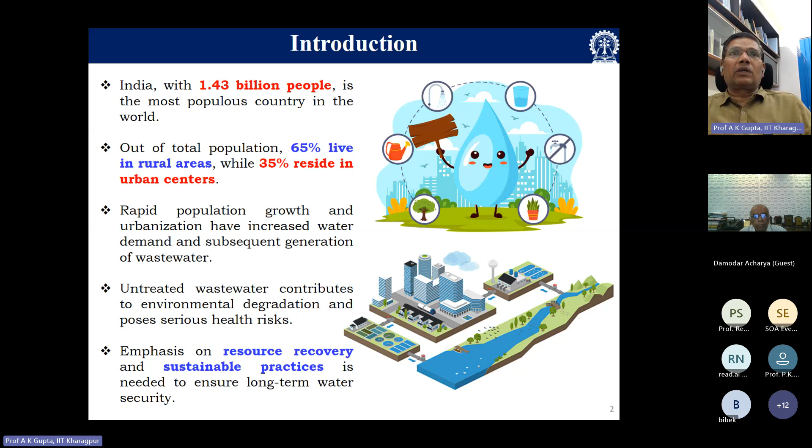As you can see from this picture, normally we see the water cycle, hydrological cycle. I have tried to make it in compact form to show how the water cycle works. We start from sources like dam and reservoir. From there, water comes to the water treatment plant. From the water treatment plant, it is supplied to different reservoirs and to residents, businesses, and industry. Once the utility is over, wastewater is generated and it goes to the wastewater treatment plant.

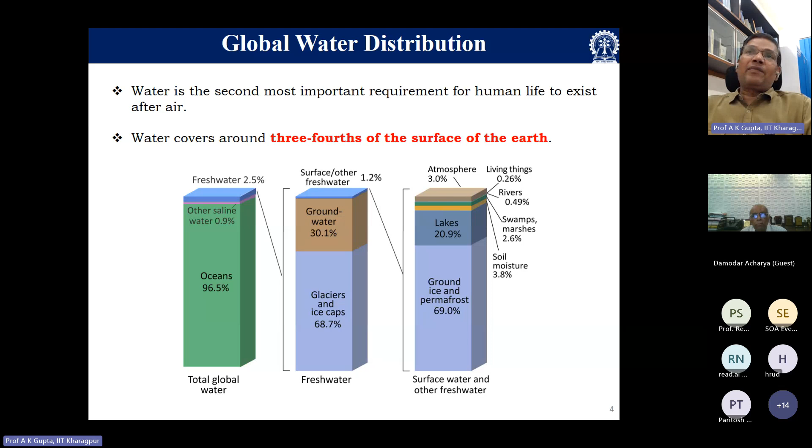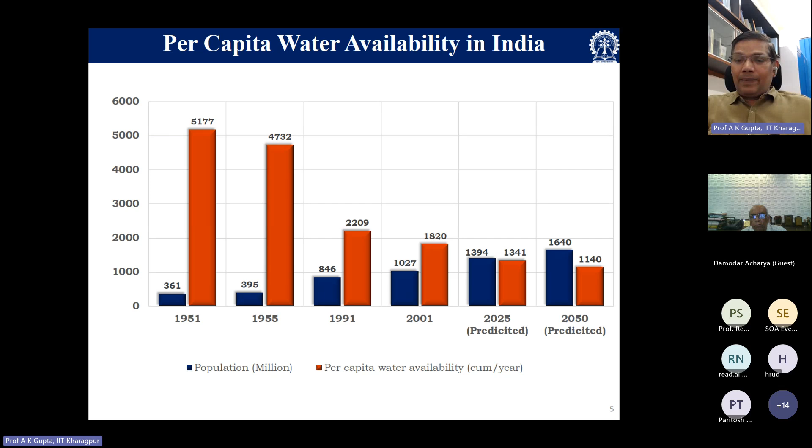So what is the importance? When we talk about water, we require raw water sources. The sources should be reliable, accessible, sustainable, and should not have over exploitation. Most important is the cost of treatment and environmental issues.

As we know, there are two major sources: surface water and groundwater. Groundwater, in most places, is contaminated, with geogenic pollutants already affecting its quality. Surface water comes in the form of lakes, ponds, and reservoirs.

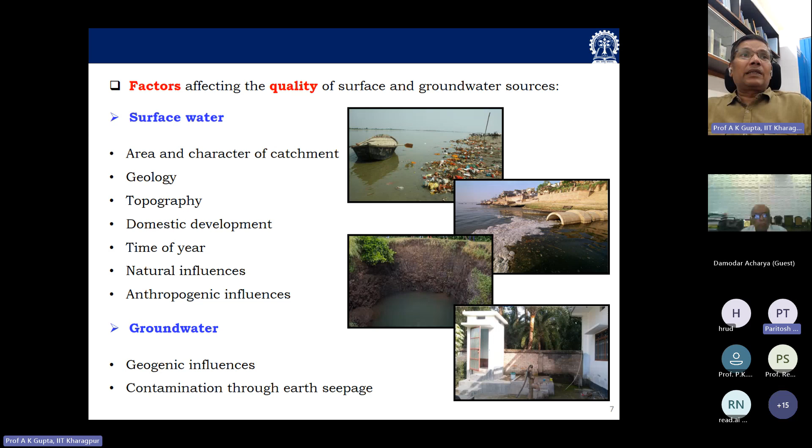Now you can see surface water availability is gradually decreasing every year, just like groundwater, because of a lot of sedimentation, contamination, and other issues, which I will come to later. So this is how groundwater and surface water are being affected.

Now you can see in India, for surface and groundwater, the government has already set up a large number of monitoring stations. They regularly monitor groundwater, particularly quality, and in some places the level, which is gradually decreasing by 20 centimeters per year, which is really alarming. In many places the groundwater table has gone down very deep, making it difficult to extract further.

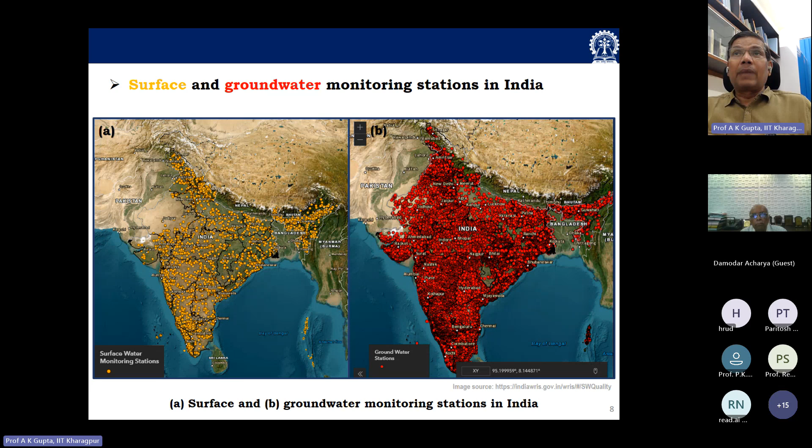Similarly, this is state-wise monitoring, and the parameters they are calculating are mainly a few quality-wise parameters, which are not sufficient. We require more than 30 parameters to be monitored if we are using water for drinking purposes.

These are the state-wise groundwater monitoring stations with different parameters. Earlier it was surface water, but the same parameters are being used for groundwater. I'm not going into detailed technical aspects, but this is so that everybody can understand.

This is not easy. As Professor Acharya has mentioned, for the first time in any IIT, only in IIT Kharagpur do we have a full-fledged water treatment plant. No other IITs have a water treatment plant. This credit goes to our ex-director Professor Acharya, because of whose initiative we were able to set up this plant.

And not only that, we are going to start another water treatment plant because of additional water requirement. So what happens traditionally in a conventional water treatment plant is mainly the removal of particles, particularly suspended particles, and some of the dissolved gases from the water.

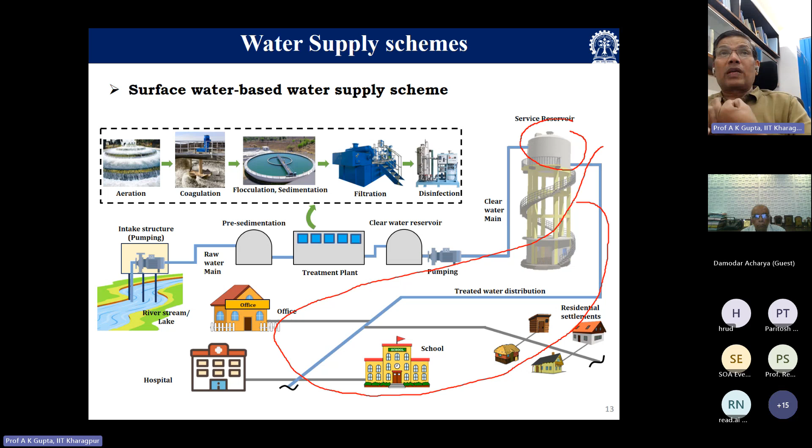If the water is contaminated, we are using more chemical, that is also not sustainable. This is similar to what I showed for the surface based scheme. Similarly, if you are taking groundwater, some of the units can be avoided. If groundwater normally has no turbidity, you can use the chemical directly, filtration can be used, and then we can supply.

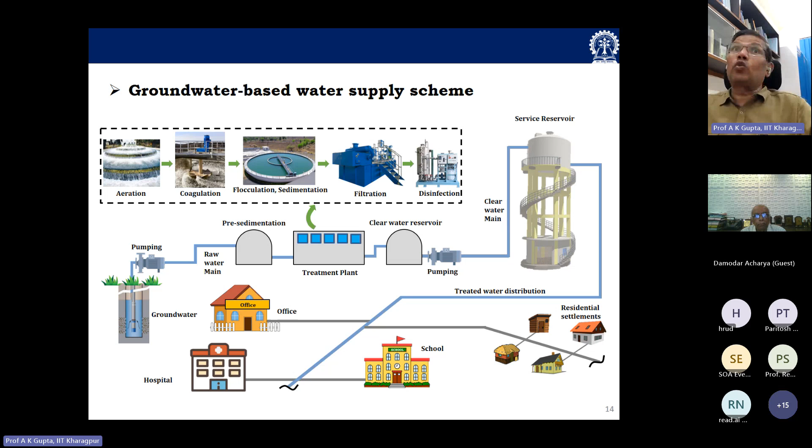It is not always good to use chemical for water treatment. Now, what is the purpose? Somebody will ask, why are we treating? So, making water safe, aesthetically pleasing, potable, and it should be free from disease-producing bacteria. That is the purpose.

So many times, everybody in the household nowadays keeps an Aquaguard or RO. We should have confidence in the public water supply, but sometimes we don't. So nowadays the government is also planning that everyone should know what the quality of water coming is. There's a lot of development now. We can use sensor based monitoring so that we have confidence the water coming in the tap is clean and can be directly consumed.

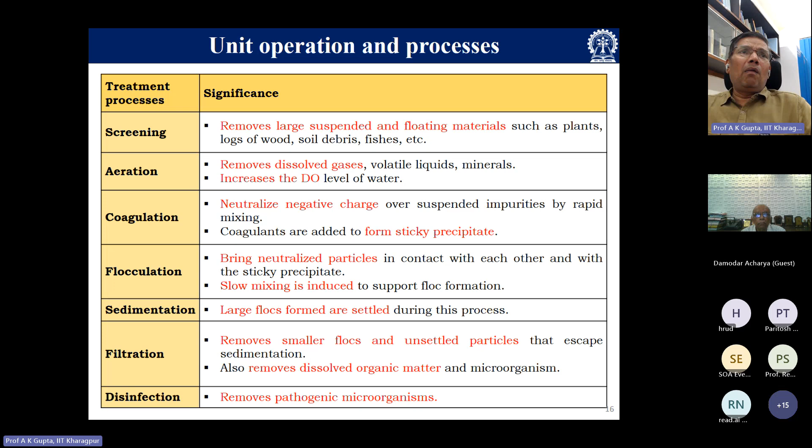Other countries have already started this. So just for a brief overview, these are the various units which we have already discussed in the plan, but not necessarily all these units should be implemented. Just to show people, this is a small animation of the major units in the water treatment plant.

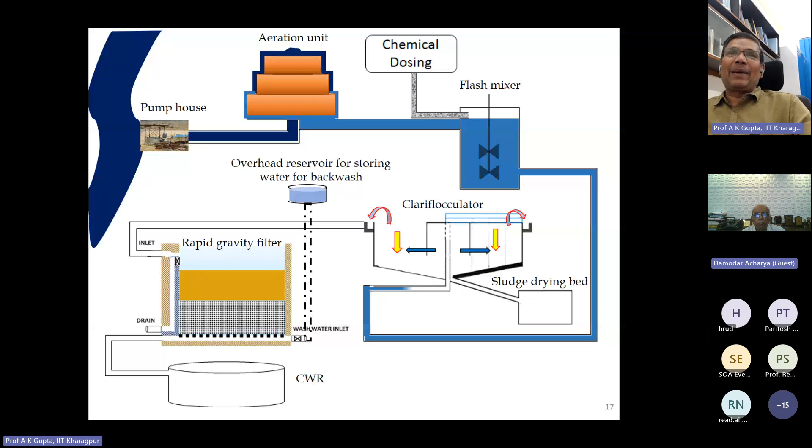You can see first we are raising the water level so that oxygen is added. Then we are adding the chemical, and after adding the chemical, along with the sludge, we try to remove whatever chemical we have added. Through the filter we are cleaning it, and then we have to store the water in the reservoir for 1 or 2 days, because sometimes there is a possibility of failure in the pumps and other systems, so that the water reserved in the reservoir can be supplied effectively to the consumer without any disturbance.

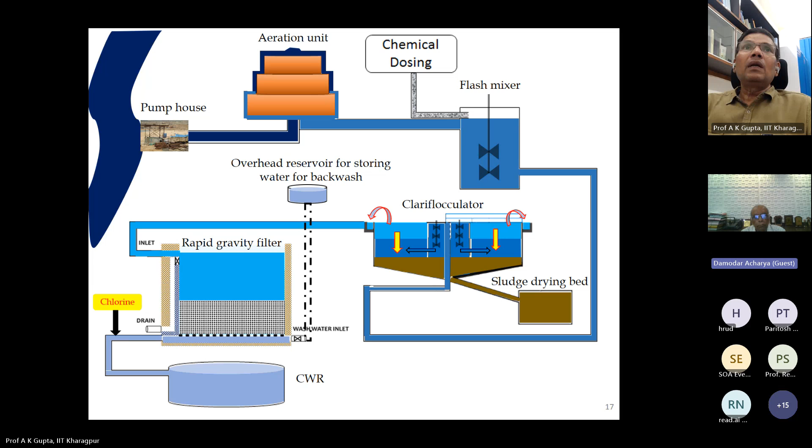Now you can see water treatment. In the last few years, it's drastically increased because of the demand of the people. Now in the Jal Jeevan Mission, which the government of India started, this is a flagship program where the purpose was to provide each and every household safe drinking water by 2024.

Many states have already achieved this by laying the pipeline. Some states are still struggling, and hopefully within another 3 months they should be able to connect. I was even associated with Andaman Nicobar Island. I did the water audit for many schemes there. Imagine a small population of 3-4 lakhs, total Andaman population maybe 6 lakh, with 3 lakh being the floating population.

Imagine the difficulty - water is all around, but there's no water available for drinking purposes. So imagine how much money they are spending to provide safe drinking water to each and every consumer. Now they have achieved 100% of the target, and in many places simply by constructing check dams they are supplying the water. The streams come and they stop the water for some time, and that water is supplied using slow sand filters.

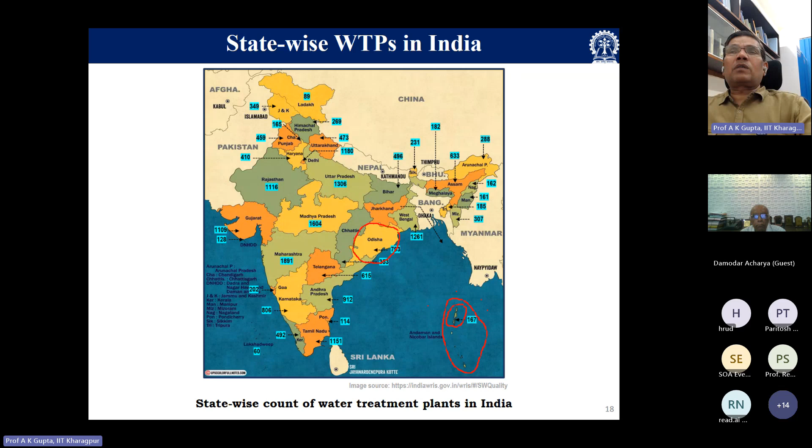Now you can see the number of plants, and imagine the importance the government has given to this sector, because this is directly related to the health of the people. If water is not good, then our society cannot be healthy. So the first focus is how to provide safe and hygienic water to everyone.

Now, many of you may not be aware that while treating the water, a huge amount of sludge is generated. This is not easy - whatever suspended solids are coming, plus we are adding chemicals. What chemicals are we adding? We are adding lime, alum, and chlorine. So these are the three chemicals we are adding to the water.

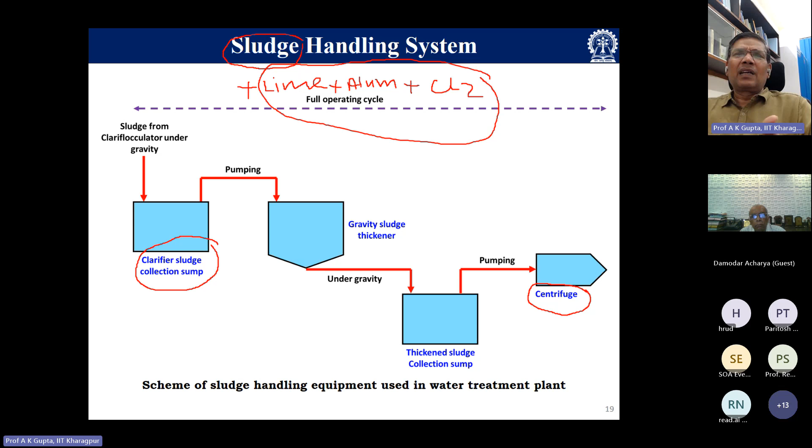Imagine these three chemicals have to be removed before supply to the consumer. When we remove them, sludge is generated. This sludge has to be removed and safely disposed of. There is a system to remove the water from the sludge, and ultimately the sludge which is generated should also be disposed of safely. Nowadays, big manufacturing companies are taking out this sludge.

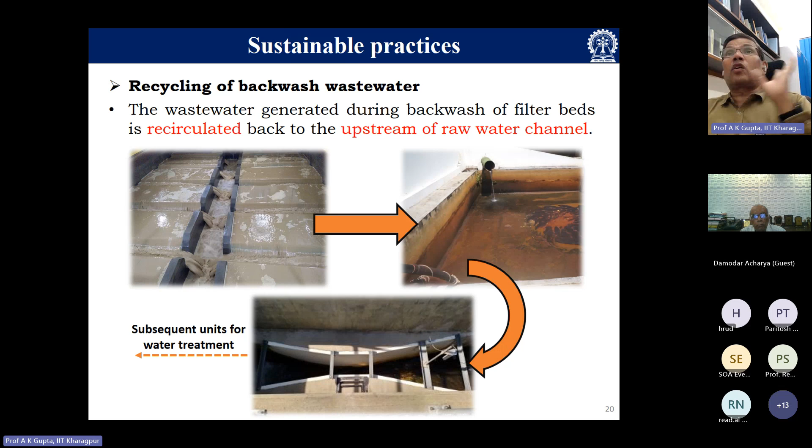Now imagine the large amount generated when we use filters. While backwashing, a huge amount of water is generated. This water has to be recycled because the biggest costly thing is water. We should not waste even 1 liter of water outside before recovering it. Even from the sludge we can recover water, and only the solid part needs to go outside. So the sludge part is also important.

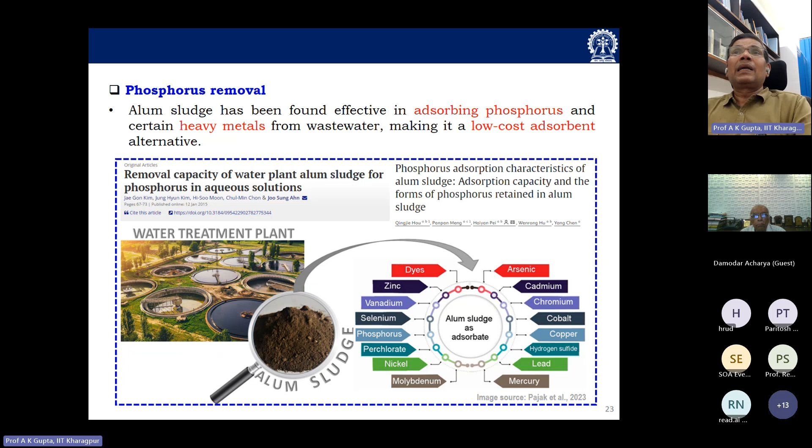This is what we call alum sludge, since alum is used. This sludge can be used for multiple purposes, such as making bricks, and nowadays alum sludge can be used for ceramic bodies and different shaping techniques. There are a large number of applications for sludge. It can be used to remove various dyes and other pollutants from wastewater. So whatever byproduct comes out from the treatment plant can also be used there. These are large number of applications of alum sludge.

As I was talking recently, I have done one project of 69 MLD water treatment plant. Imagine 69 MLD - it is not small, it is very big. Imagine 69 million liters of water per day. The problem was that space was not available. Land was also a problem. Because the water they are taking is from the Ganga, water was not a problem, but constructing 69 MLD, they said land is not available.

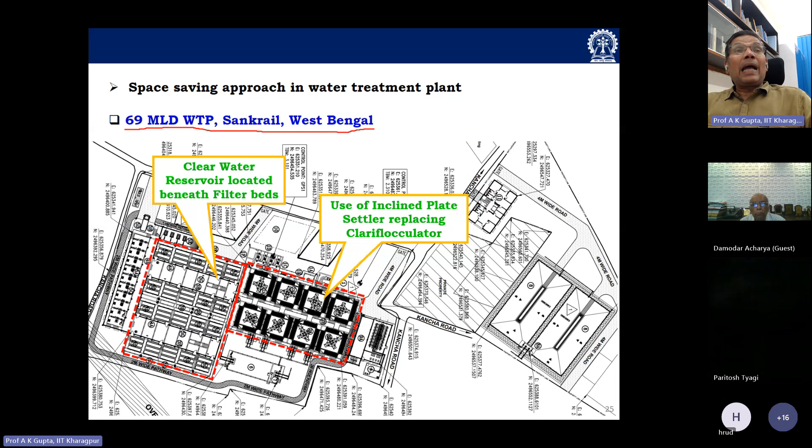So we had to think about how this space could be managed. In this project we recommended the inclined plate settler to be used. You can see in the treatment plant, it is multi-story. This is the first time a multi-story water treatment plant was used. Below the filter plant there is a reservoir constructed. You can see earlier I showed you that we required a sedimentation tank, but here there is no sedimentation tank. They use the inclined plate all around the flocculator so that the space of the sedimentation tank can be avoided.

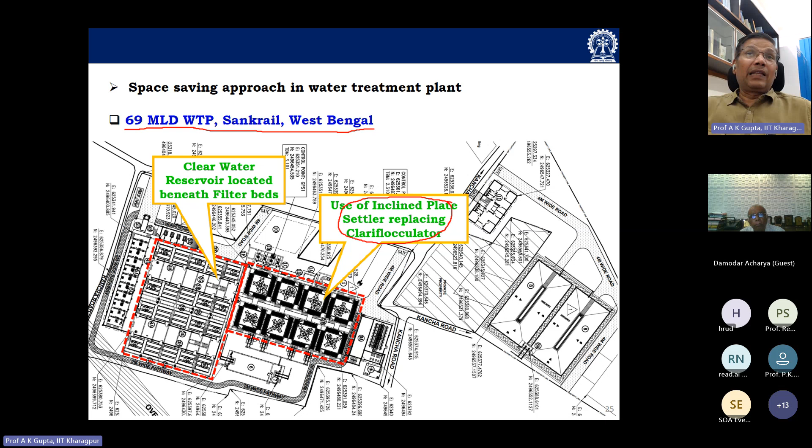And the reservoir is below that. So there is a lot of advancement. You can see how these different units use the technology of the inclined plate settler and tube settler, where they can provide clear water and the area required can be less. This is, I think, the first plant in West Bengal to use the inclined plate settler. Already even wastewater plants are being constructed multi-story because of shortage of space.

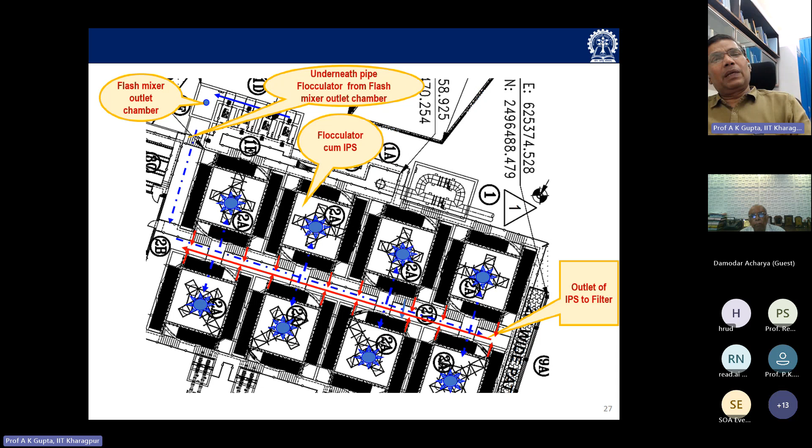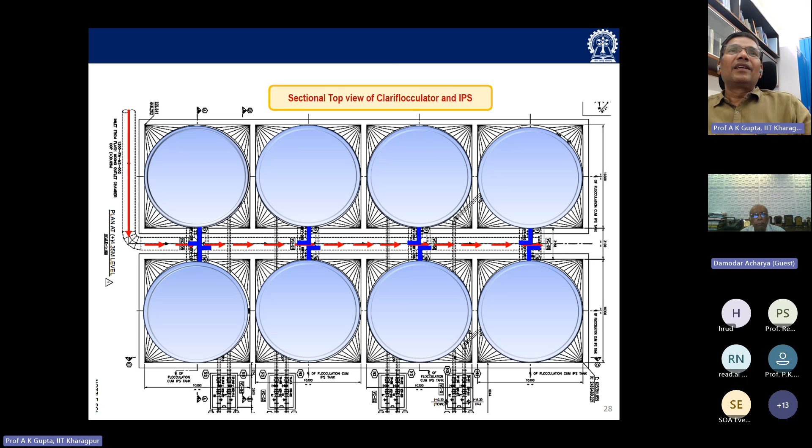This is another view of the flocculator, and this is the top view. This was a very interesting project where the reservoir was constructed below the filter. Normally earlier we construct everything separately, but here most of the units have already been constructed, so very soon it will start operation. This is space saving.

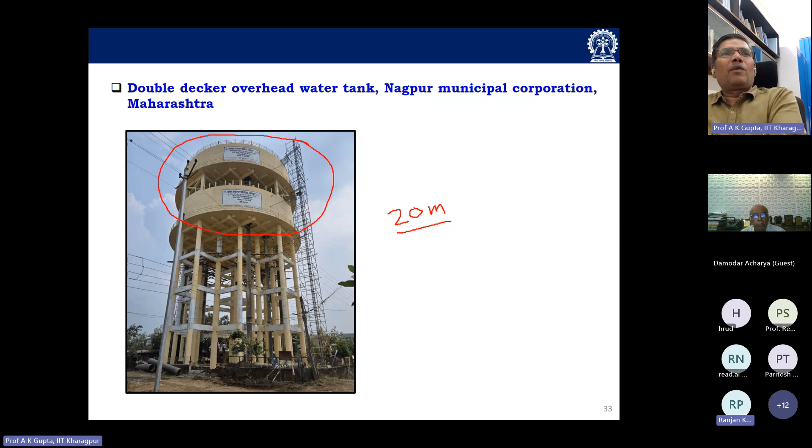Now you can see, recently in Nagpur, the overhead reservoir has also been constructed multi-story - a two-story reservoir. Normally the reservoir staging height is around 20 meters, 15 to 20 meters is the staging height. So what happens is consumers always complain when they are not getting sufficient pressure in their houses. Normally government recommends pressure like 7 meter, 12 meter and 21 meter.

So this much pressure is needed, but what happens is 21 meters is difficult because we are constructing reservoirs with 20 meter height. Sometimes, because of the topography, if our houses are lower than the finished ground level of the reservoir, then we can get slightly higher pressure also.

I was also associated with the first 24 into 7 water supply project. Many of you may be aware of the 24 into 7 water supply project. For India, the first 24 into 7 water supply project was initiated in Mysore water supply, meaning 24-hour water is available. In Mysore this project was initiated, and the topography was such that many people got higher pressure because their level was much lower.

So in this design, what is the target? Nearby houses can use the first time, and people who are far away can use the later time, so at least people who are away from the house also get the required pressure. As is known, around 5 meters is the loss of pressure per kilometer while traveling. So if water consumption is more, pressure loss will also be more, because it's directly related to Q, the discharge. If discharge is more, pressure will be less.

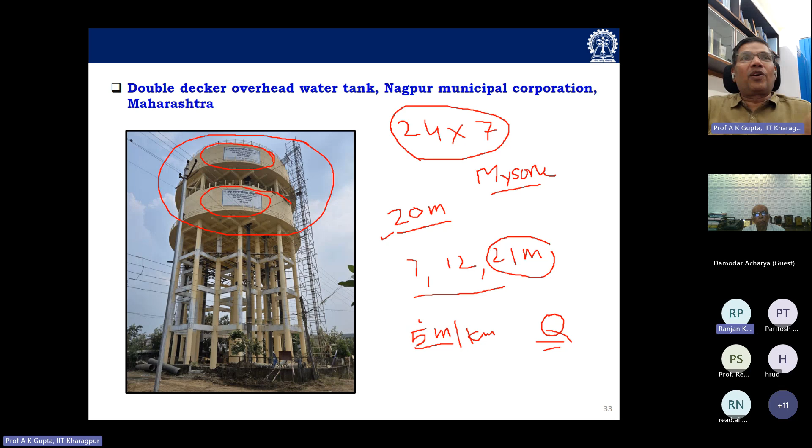These are from Nagpur, recently constructed. I wanted to show how space plays an important role for water supply distribution. These are mainly used to enhance capacity and pressure management, and this is cost effective also. The footprint is less because we use the same area going high rise. So this is one of the new initiatives that was done.

Now, recently I worked in Odisha, for the Steel Authority of India Limited. Here they have a lot of limitations. They cannot use a very high reservoir for supplying water, and sometimes plain land is not available. So we thought about how the topography can be used effectively for construction of the plant. We used the natural topography to reduce construction costs, constructing almost all units at ground level without any overhead structure.

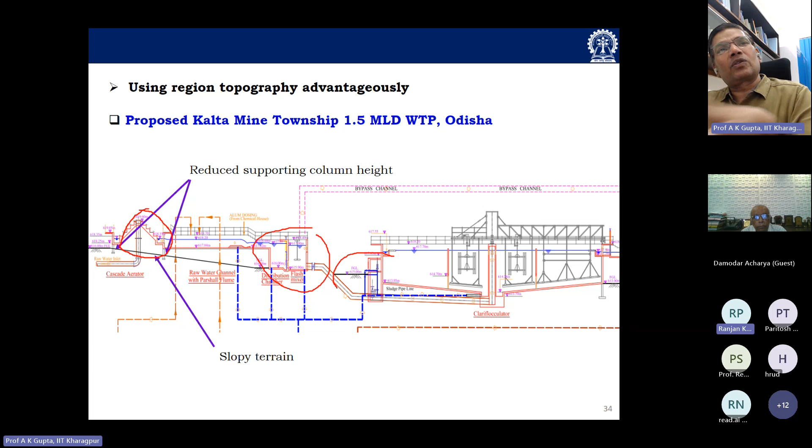Now I'm coming to highlight some government initiatives, because a lot of work has been done in this sector. Our Honorable Prime Minister has major focus on the water sector. He has said each drop of rainwater should be captured, and that's why they started the Catch the Rain initiative.

The Catch the Rain initiative means capturing each and every drop of water during the rainy season. We should conserve it, store it, and reuse it as much as possible, because in many places in the country we have sufficient rain, but it's our fault that we are not collecting that rainwater, which is much cleaner compared to other water resources.

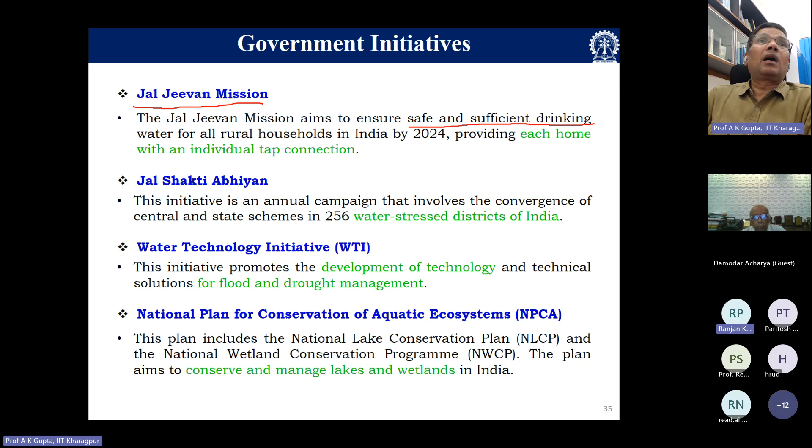Government of India's initiative, Jal Jeevan Mission, as all of you are aware, had the purpose of providing safe and sufficient drinking water to every rural household by 2024. All households should get an individual tap connection. Earlier this was not there; we provided community taps. So this was one of the initiatives, and IIT Kharagpur also contributed a lot to the Jal Jeevan Mission water initiative.

We gave our economical and efficient designs, and were associated with various water audits, design, and implementation of the Jal Jeevan project. Similarly, Jal Shakti Abhiyan had the purpose of an annual campaign about water for 256 water-stressed districts of the country, targeting how these districts could be handled so they also get water.

Another initiative is development in technology, because technical intervention is needed to solve the challenging problems of, particularly, flood and drought management.

Another initiative is the National Plan for Conservation of Aquatic Ecosystems, which includes the National Lake Conservation Plan. This is very important. Even in Bhubaneswar, many ponds were contaminated, and now they have been beautifully restored into lakes where people go. So this is one way research is also happening. The government has a massive plan for lake conservation and pond development, so that not only does research happen, but some places can also be used for water supply.

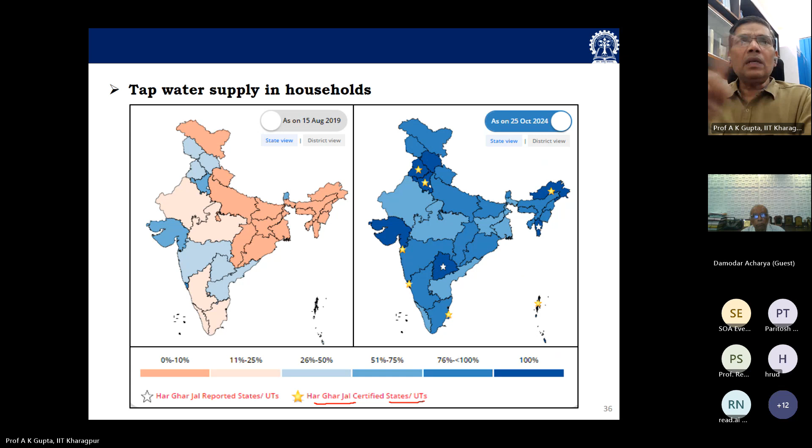To make sure water is provided and whatever wastewater is coming, because these two are linked, I will discuss later in detail how water and wastewater are associated with each other. Suppose river is our source of water, and upstream we are discharging the wastewater. So what will happen? The same contaminated water is coming into the intake structure. So it cannot be seen in isolation. We have to take care of wastewater management also along with water, otherwise this cannot be sorted out.

Before starting this, I'll give an example. Like Mumbai, now some industries are purchasing wastewater also. Government of India has already initiated National Mission for Clean Ganga, called NMCG. They have already funded many projects along the Ganga and its tributaries to construct wastewater treatment plants. This wastewater treatment plant is such that the government spends some money, and for the next 25 to 30 years they will sell the treated water to nearby industry, and that treated water will be used in plant operation. So this is one of the initiatives already.

Calcutta, several plants have been constructed. IIT Kharagpur was also associated with many such initiatives. So imagine how much wastewater is generated. Right now, in 2020-21, around 72,000 MLD of wastewater is generated in urban areas, and in rural areas around 39,000. So a large portion of this is being released into the aquatic environment with either no treatment or partial treatment.

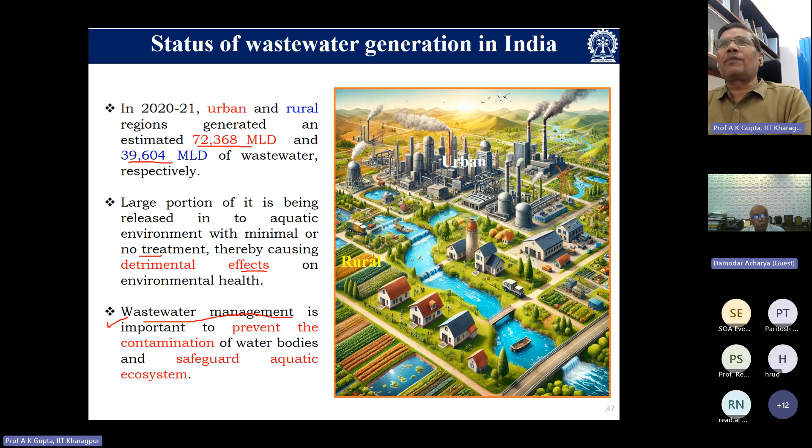So now the government's focus is, first, there should not be any wastewater discharge. Let it be used before discharging. If water is required, let it be reused. So the focus was on how to reuse this water. And second, the public should have confidence while using it. They should be made sure that they are getting cleaner water.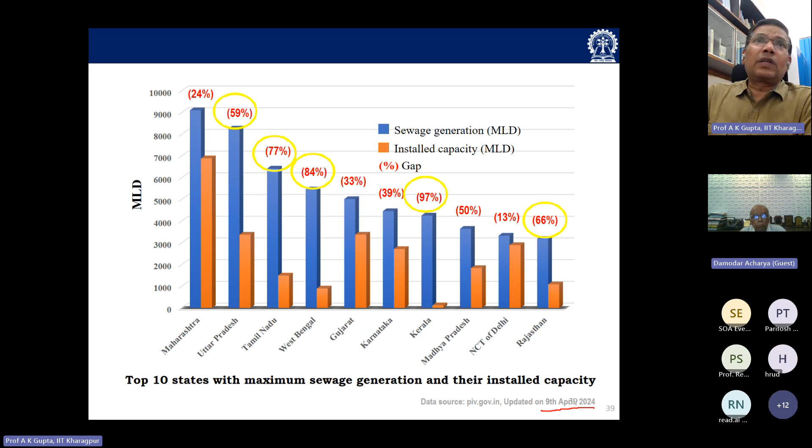So imagine these are the wastewater treatment plants across the country, but still there is a gap. These are recent reports from 2024 only. You can see still many states require massive sewage treatment infrastructure. Maharashtra has the maximum wastewater treatment plants, followed by Uttar Pradesh - these are the statistics. So we still have potential not only to treat but also to reuse this treated water.

Now the major problem with this wastewater: we have large amounts of suspended impurities, high biodegradable and non-biodegradable organics, we have nutrients - all this, otherwise people will not use it. So, as all of you are aware, whatever water we need...

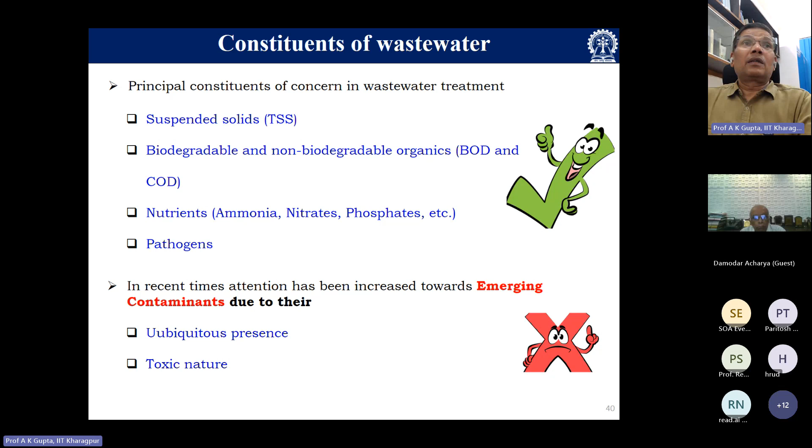Whatever water we need, 90% of the water we use for agricultural purposes. 90%. So can we not create facilities to treat this wastewater to be used for agricultural purposes? With proper planning, we have to convince the farmers, and in many places they are already using it. Sometimes when they do not have water, they simply use wastewater for their agriculture purpose, because many places cannot afford groundwater pumping - here no pumping is needed. From nearby, whatever the gravity flow, nearby farmers can use it. And even if pumping is needed, at least water is there. It is high time that this treated wastewater should be used for agriculture purposes so that this 90% consumption can be minimized.

So these are some of the important parameters which can very easily be removed. Earlier it was difficult, now it is not difficult. This contamination can be easily handled.

And in recent times, what happened? There's a lot happening at the global level in emerging countries, and the maximum impact is after COVID. So these are called emerging contaminants. These are very toxic in nature, and nowadays you must have seen the example of discharge from hospitals, some of the medicines we use. So this emerging contaminant also needs to be treated. But first we have to treat these four parameters so that water can be used. But yes, this emerging contaminant can also be treated.

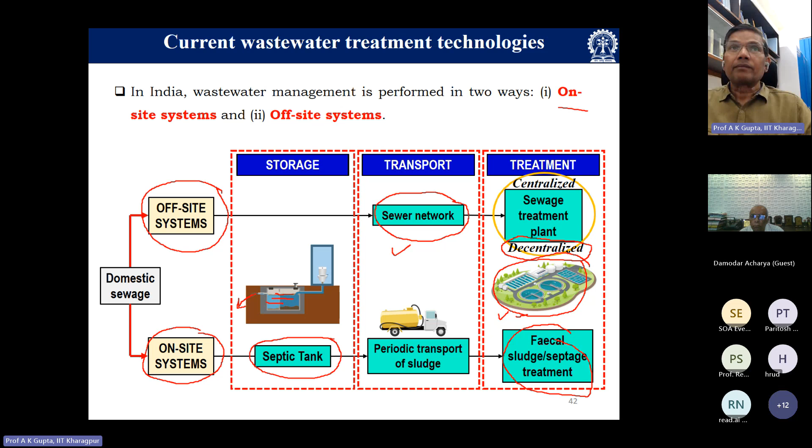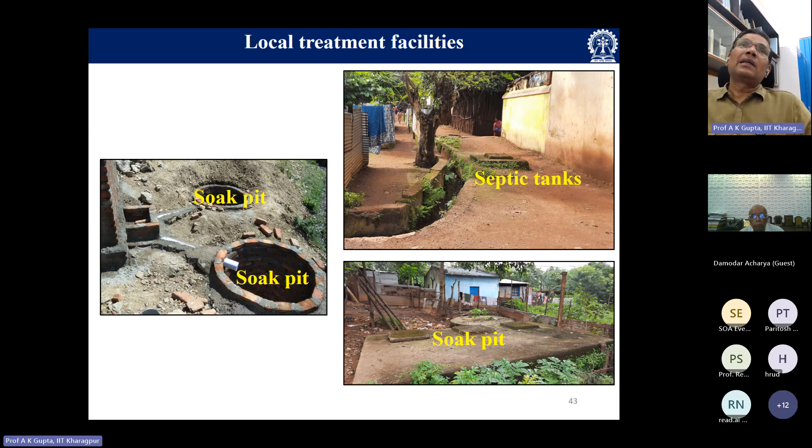You can see many places they are using septic tank and soak pit for small setups. This was one of the small mining towns where people have constructed a soak pit and septic tank. For small isolated houses, this is fine, but when we have a large population, we should go for conventional wastewater treatment.

So this is how conventionally we treat this water. You can see we have a scheme: grit chamber, primary clarifier, then secondary level treatment where we nowadays have various options that can be used. These are the main ones. We are using the aerobic option because the smell is less.

Similarly, for tertiary treatment also we have various options. After this treatment, 100% treated water can be used for everything, even the process also.

As an example, RCF, Rashtriya Chemicals and Fertilizers in Mumbai, many of you are aware of this industry. This RCF is taking wastewater from the Municipal Corporation of Mumbai, BMC, treating it, and using wastewater for the entire process. It's still cheaper than if they had to take seawater, because seawater RO-based membrane treatment is costlier than this. So the municipality is selling the water to them, and they are treating it and using it for various processes.

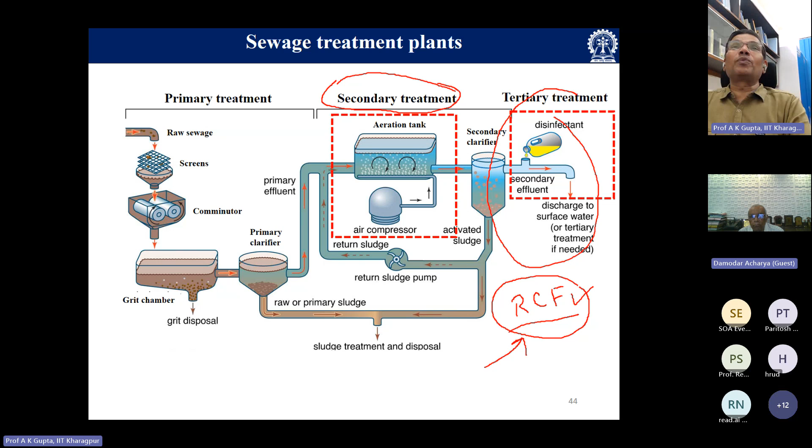So slowly and continuously, the time will come when people will reuse 100% of the wastewater. Singapore has already proved that they treat and reuse 100% of their wastewater. Even some bottled water is taken through this wastewater. So the time has completely changed where this is no more waste, it is a byproduct. In fact, even the word 'wastewater' should be changed. This is not waste, it is simply a byproduct generated after use.

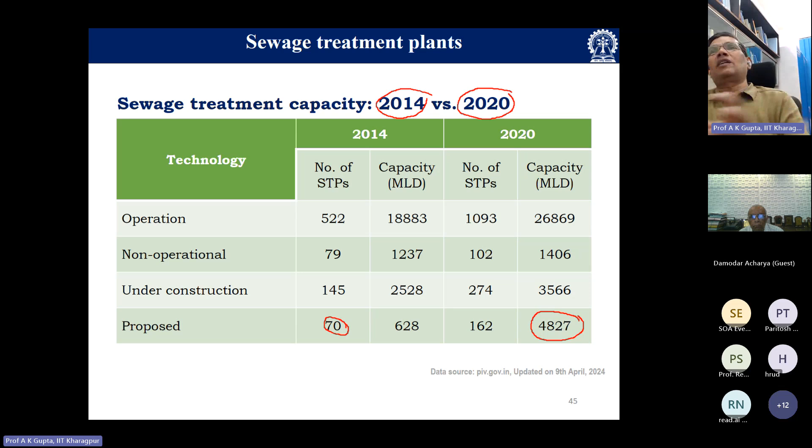Now on the technology side, there's absolutely no problem. There are a large number of technologies available. We have the moving bed biofilm reactor, which is very effective, and we have SBR technology which new plants are being constructed with, where space requirement is less. Earlier we used the activated sludge process based treatment system. So you can see, capacity-wise, there are different treatment systems.

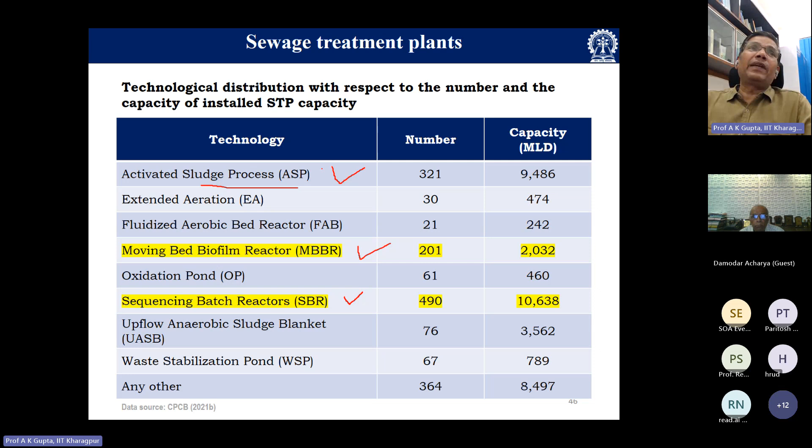IIT Kharagpur is also working on this sector, and we have proposed many places and set up plants in campus too, in some hostels, so that we are working on the advancement of the carrier, making it less space-consuming and very effective in treating the water. Almost more than 90% of the wastewater treatment can be done with one reactor only. This was one sector we worked on, to see how effectively we could develop the carrier so that more biological development will happen and the wastewater will be treated effectively.

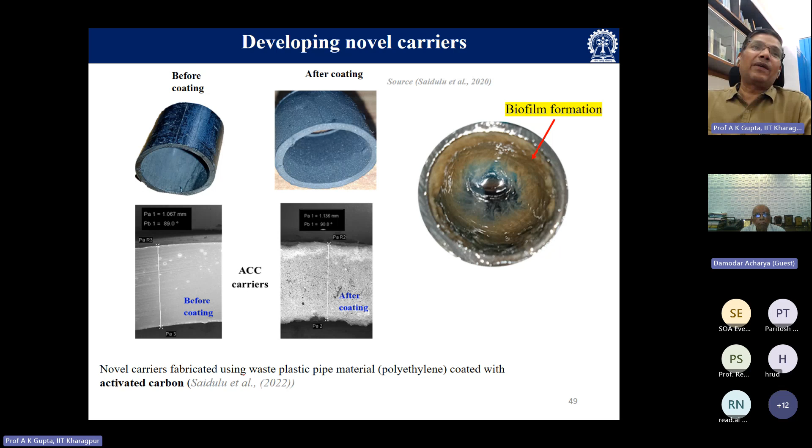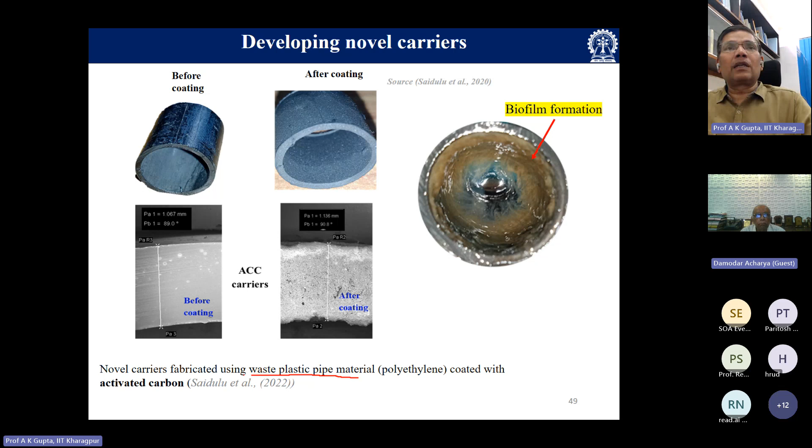These are some of the challenges the carrier was having. We have used a simple water pipe, cut it, and coated it with carbon, and it's very effective. So this work also uses waste plastic pipe material coated with carbon, and it's very effective. We used it for our research purpose and found it is very effective. This is the small treatment system we created, and we found it is very effective for the wastewater treatment plant.

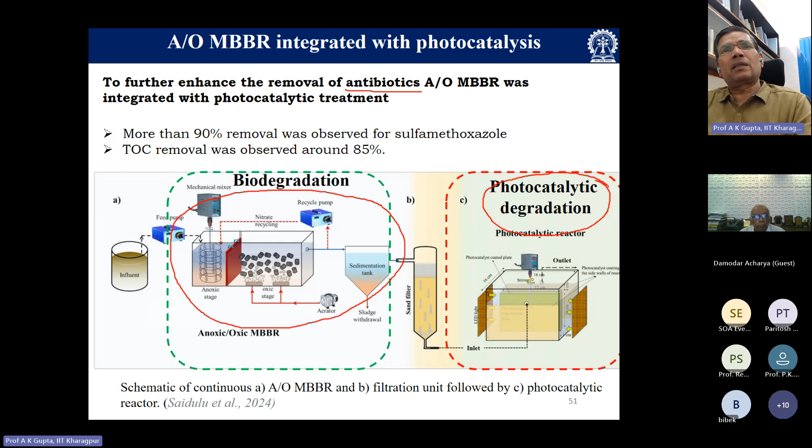Yes, this can be done. And as I said before, we have large amounts of antibiotics and other emerging contaminants, so after this complete treatment, we can go for the advanced treatment we call photocatalytic degradation. That can also remove 100% of the antibiotics and emerging contaminants. We have tested this here and it is very effective, able to remove 100% without any additional sludge generation.

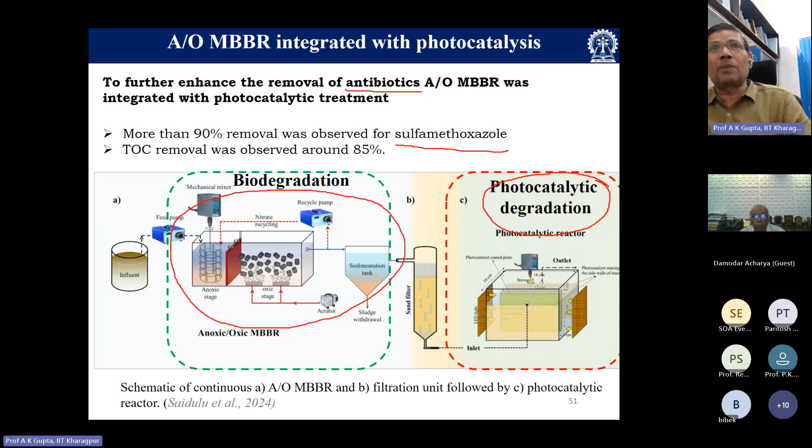They used some of the emerging contaminants for this treatment, which we synthetically developed. Later on, at the hospital, we also set up one plant where hospital waste was treated.

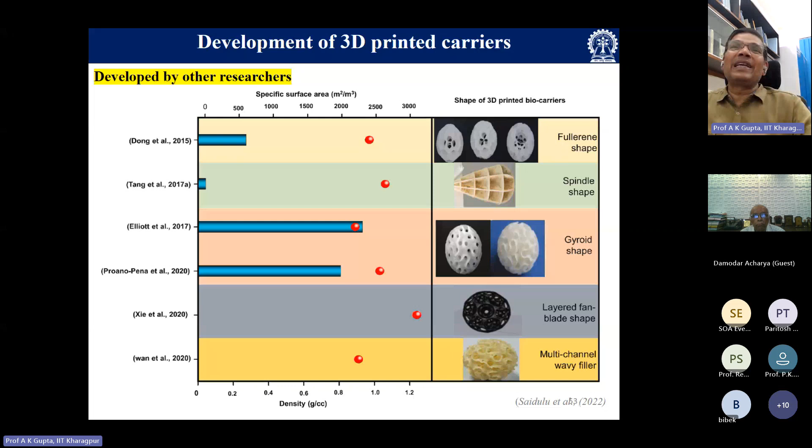These are some of the advanced carriers we developed. This is 3D printed - for the first time in the country, IIT Kharagpur has developed 3D printed biocarriers. We are working with a ministry project also, and we are going to set up another plant on the coast so that this biocarrier can be used. These are the new developments. Some metallurgy professors are also involved, helping with the material part of it.

Now, in this sector also, Government of India has introduced various developments. One was ZLD, zero liquid discharge. In 2013, Government of India said - I don't know how many of you are aware of this - zero liquid discharge means if your industry is generating waste, the government said you should not discharge outside any waste, even any water, from the premises.

Because if you require additional water, we'll provide it, but first you use all your water, then additional water we provide. But you must first treat your entire wastewater. In many places already the industry said we are ZLD industry, already started. So at least this thought came to industry people, that we should go for sustainable development. Asian Paints in Mumbai has also implemented this, because the paint industry also has huge amounts of heavy metal contamination. So they also started ZLD.

Another government initiative is the manual scavenger scheme, they started rehabilitation in 2013, for cleaning up sewers and septic tanks. Earlier, you must have heard that because of methane gas generating, sweepers and others sometimes lost their lives while cleaning the septic tank or sewer. So now this can also be cleaned mechanically.

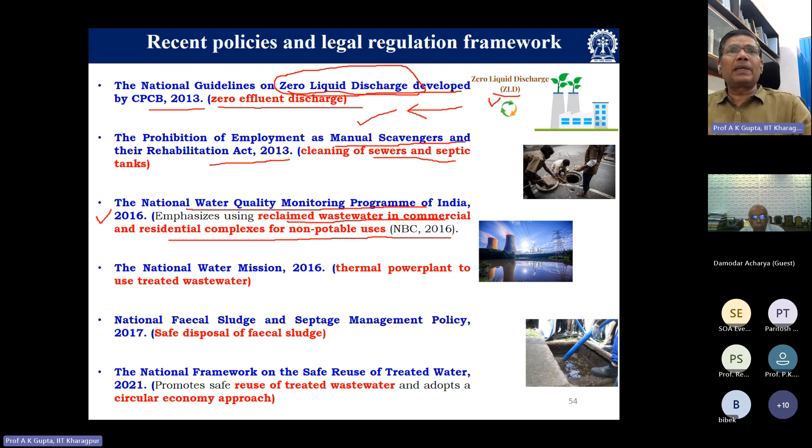National Water Mission, Government of India initiative - the major purpose is already in the guidelines. Thermal power plants have initiated using treated water for their plant operations. Already started.

If wastewater is generated nearby, the thermal power plant has to take that wastewater and use it for their various operational purposes.

Another important policy is the Fecal Sludge and Septage Management Policy 2017, where they started safe disposal of fecal sludge. In 2021, the national framework on the safe reuse of treated water was also initiated.

The major purpose was to promote safe reuse of treated wastewater and adopt a circular economy approach, so that whatever cost we are spending on bringing water from far away can be reduced. Imagine Delhi is the right example.

They are planning to take water from Haryana, or take water from Himachal, carry it from Uttarakhand. Imagine, this is not easy to transport water. The whole water sector has a very high energy requirement. It is not possible for one pumping to send water 100 kilometers.

So huge amounts of energy are needed. That's why if we adopt reuse of treated water, then at least some amount of river water and groundwater use can be minimized or avoided.

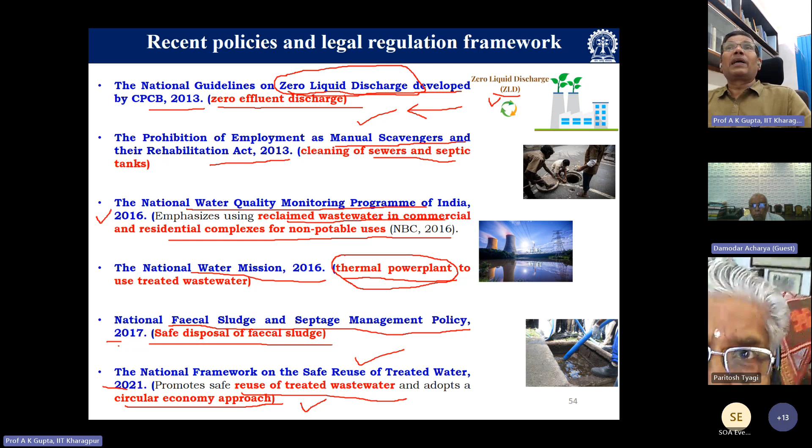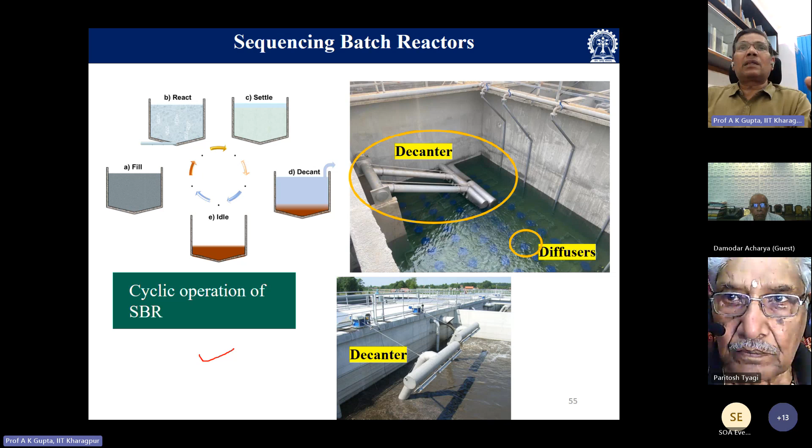So this is what is being adopted nowadays. This is also a space-saving approach, but we are working on how to further enhance the quality. We have already started working on how to integrate it with other technology, so that it becomes a hybrid treatment, integrated with some other treatment approach or modification, so it can be more effective.

The time has come for this, because earlier it was the concept of discharge, now the concept of reuse has started. So for that purpose, we have to get ready for potential future research in this area.

Another one, sir, as you are all aware, is the constructed wetland. Earlier you must have seen the natural wetland, so this is the constructed wetland. Here, this is a very simple design. Since this is for rural India, where electricity is not always possible and they do not have costly mechanized equipment they can handle, this is the best approach, and land is also not a problem. This treatment is very effective.

With this wetland, I was visiting European countries, and most places use wetlands, even though they are very rich. I went to Italy, and even most industry people there are using wetlands. In our country it is not that popular, but in Europe I have noticed this wetland is very common.

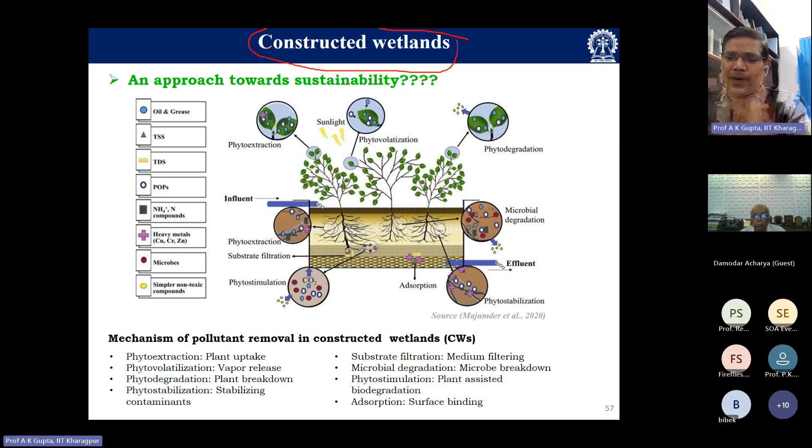So this tank can be created, and we fill it up first with sand, then small size gravel, bigger size gravel, and if we want an aggregated one, as other countries are doing now. You can see the plant also has an uptake, and because of this various reactions are happening, and in this process the treated water comes out from the outlet.

Now you can see we have also developed a system where we put a filter after this, and we made a channel, a kind of special system, so that space requirement is reduced, and at the end we have put the filter. This is the filter we put. So whatever treated water comes out, we can take it through the filter, so very good quality water comes out.

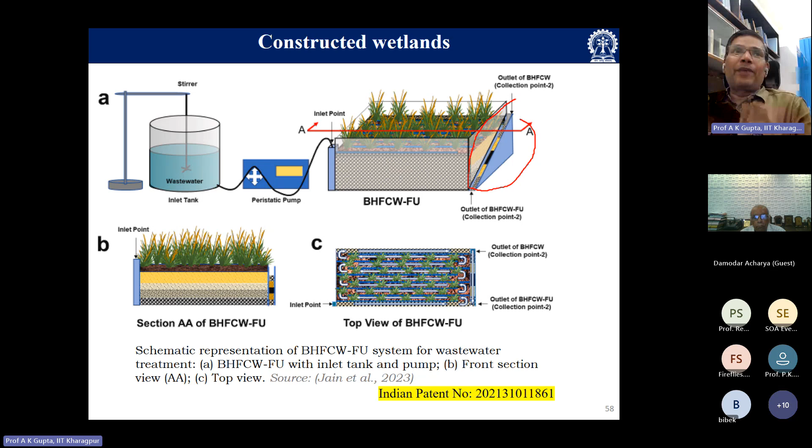At IIT Kharagpur we have patented this, it is very effective, and we have implemented it here. So these are a lot of different wetlands adopted in the country.

You can see, outside it looks like a garden, no? And below this, treatment is happening. I have seen in Alwar, in one park they set up this wetland, and nobody recognized that wastewater was passing below this, it just looks like beautiful flowers over there.

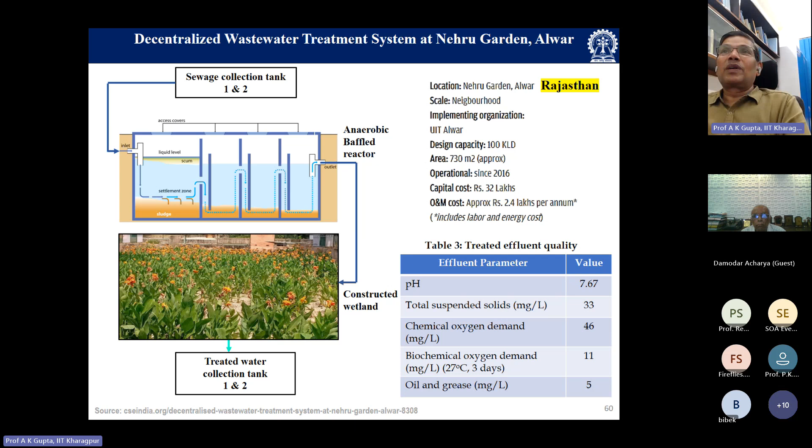So this is some of the fecal sludge approach as I have said.

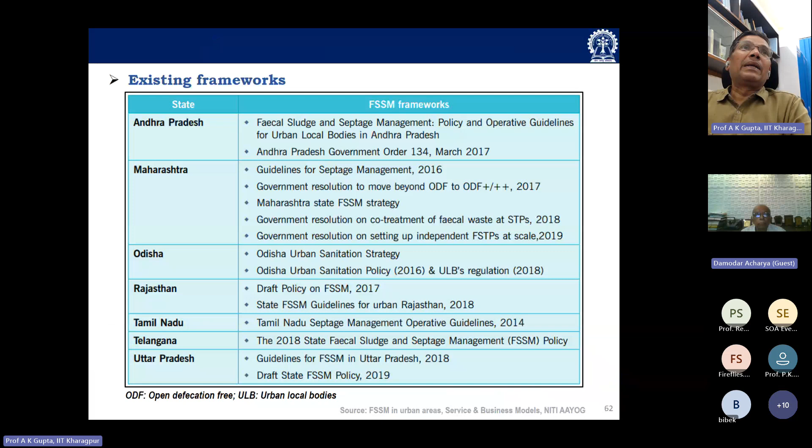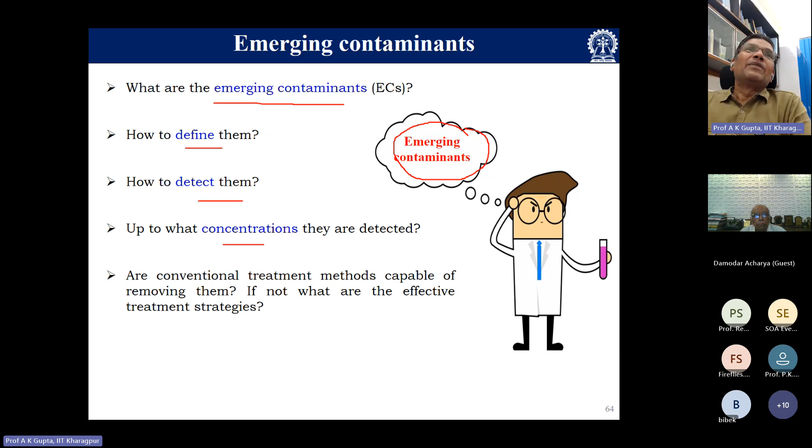Now I will talk about emerging contaminants. As you are aware, this is why it is called emerging - how to define it, how to detect it. All European and US researchers have started working on this, and tremendous funding is coming for emerging contaminants. In India, detection is a problem, so we are a little slow on this, but we have started whatever is possible to detect it. Broadly, we can define it as a chemical or microorganism that is not commonly monitored in the environment. There are different types, Type 1 EC, Type 2 EC, emerging contaminants.

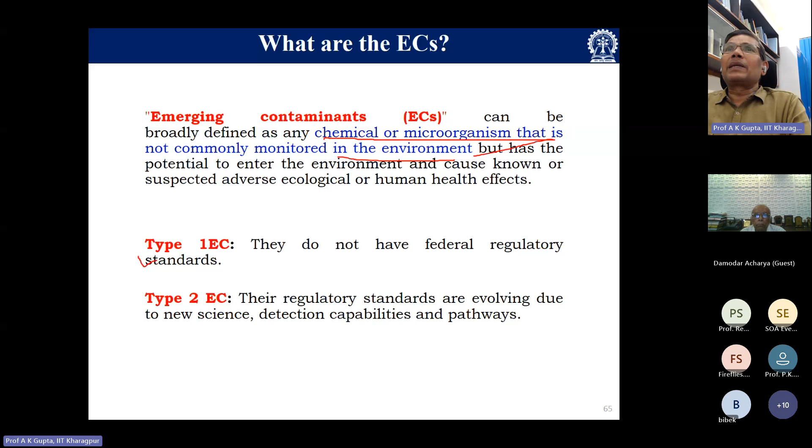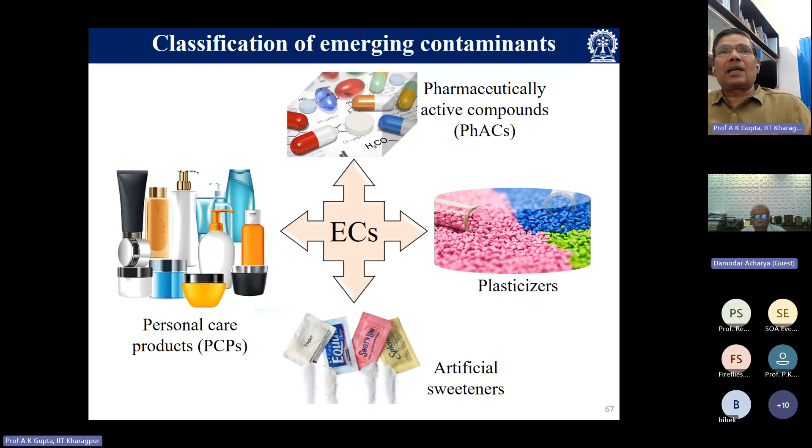After generation, a lot of emerging contaminants come through hospitals. The Government of India has already encouraged hospitals to construct wastewater treatment plants before discharging to the public sewer, to make sure there are no emerging contaminants. Similarly, for other point and non-point sources, they are planning how to minimize emerging contaminants before they reach groundwater or surface water.

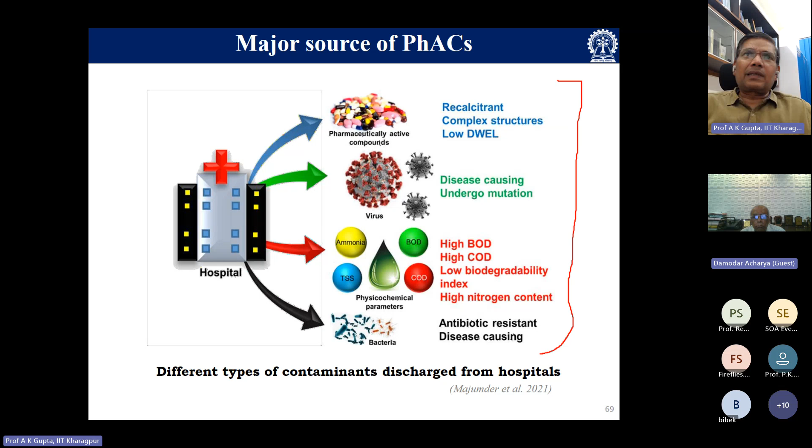These are the major sources of pharmaceutically active compounds, for which hospitals are mainly responsible. After COVID, hospitals started thinking that they should not discharge this contaminated wastewater outside. So they have already taken a lot of initiatives, and most hospitals have started constructing treatment plants. These are the current practices they are adopting.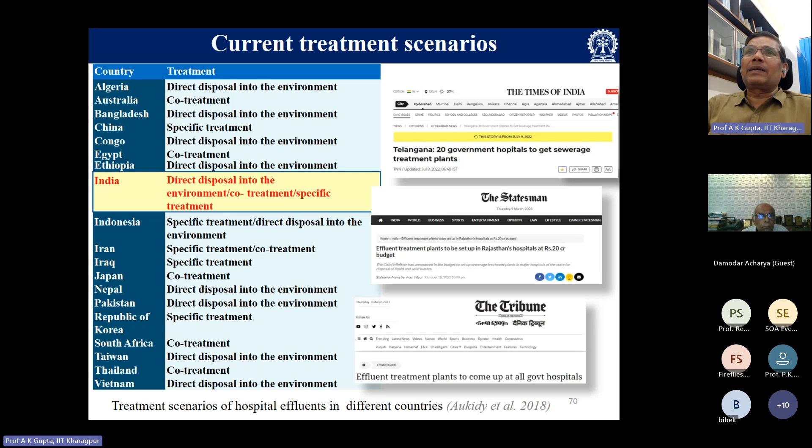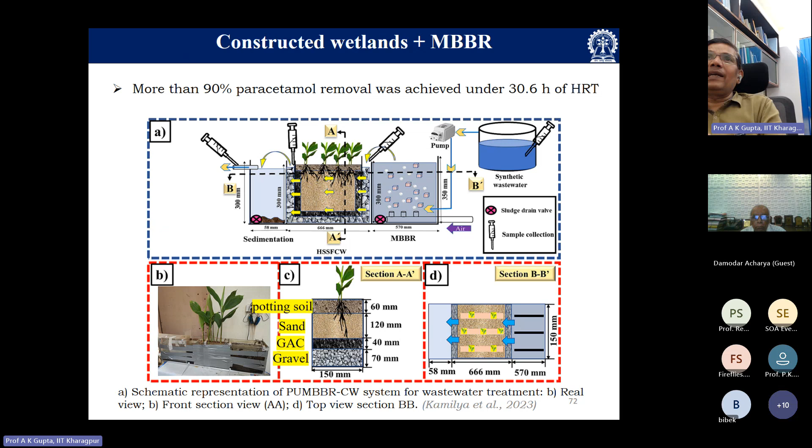This is one of the initiatives we did in Kharagpur. We thought to use low-cost treatment with a constructed wetland, which is very effective. After the constructed wetland, we built a photocatalytic reactor to handle treatment of emerging contaminants. These are some of the advancements we made - we have pre-treatment, the constructed wetland, and along with this an MBBR, so the hybrid treatment reduces area requirement and the treated water can be effectively reused. This is the approach we initiated in Kharagpur.

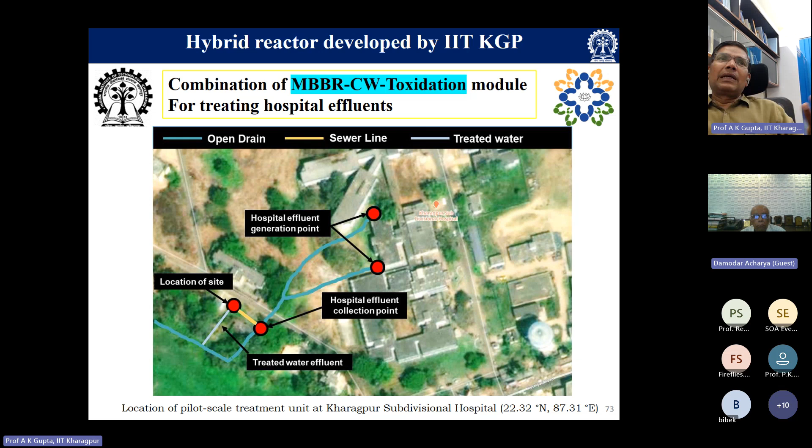We constructed a treatment plant at our Kharagpur hospital, outside the campus where we have a state hospital. This was funded by DST. We requested the hospital to give us land where we constructed this bio tower and MBBR, which is what we have patented.

The advantage here is that by using this MBBR and bio towers, there is no need for any additional sludge generation. This is a small scale plant of 3 KLD, since that much collection doesn't happen in the hospital. So we used a small plant, but everything has been tested in it.

We have a constructed wetland - you can see the flowers, which sometimes grow so big we have to cut them every 2-3 months. This is the country's first aerated constructed wetland. This project is a European project, and the European partner helped with this aerated constructed wetland.

Along with this, they also helped with the oxidation module, which you can see here. We have a carbon filter, a sand filter, and we are also generating chlorine radicals, which help in killing antibiotics and removing them. You can see these are the carriers, the circular part, and these are the sludges. We made a sedimentation tank at the bottom of the tank.

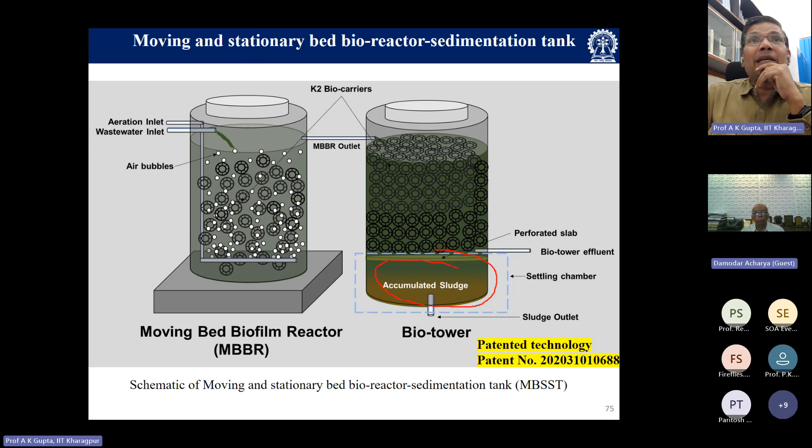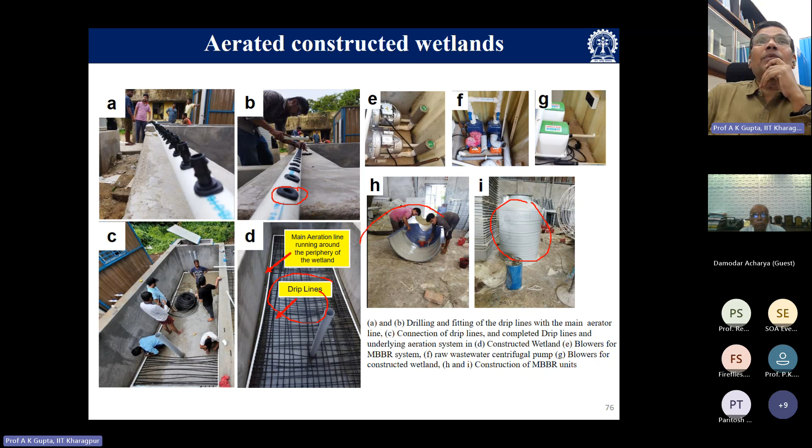These are the pumps, and here are the pipes to collect samples. You can see the sand, gravels, and now the bubbles coming, air bubbles - these are the plant growth. The laying of the drip irrigation line, filling with gravel and coarse aggregate, leads to formation of air bubbles at the top of the water.

For plantation, we have planted Canna indica, and very good flowers are coming. This is the low cost treatment.

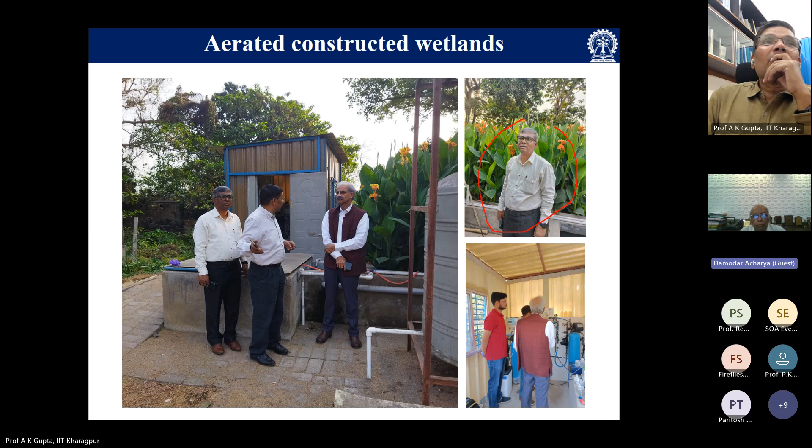These are the oxidation module, UV unit, and media filtration. All contaminants can be removed very effectively through this.

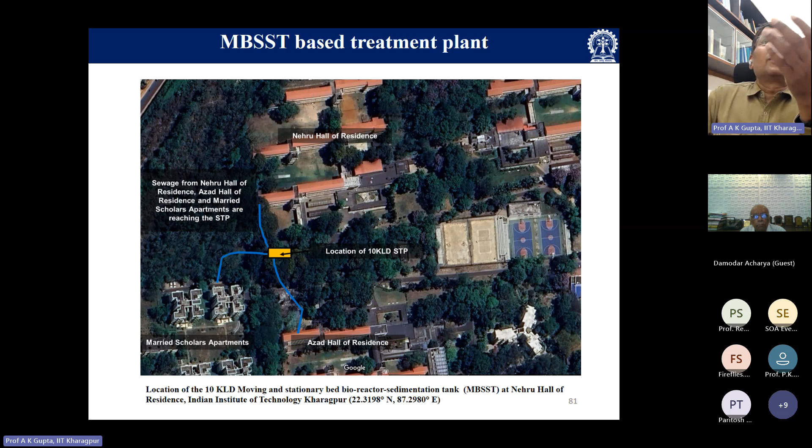This is another plant we constructed at our hostel, Nehru Hall of Residence. This is a small 10 KLD plant we built in the hostel, just near the gate. It's the same MBBR based plant - we call it MBSST. Here also we used an equalization tank, then MBBR biotower and sedimentation tank. We are tapping this from the manhole and trying to use this water for gardening and other purposes.

We have improved the secondary sedimentation tank by providing an additional biotower - this has been modified. Now we are further modifying this, integrating it with solar panels. The new setup is starting with solar panels and modifying the carrier, so the research is ongoing.

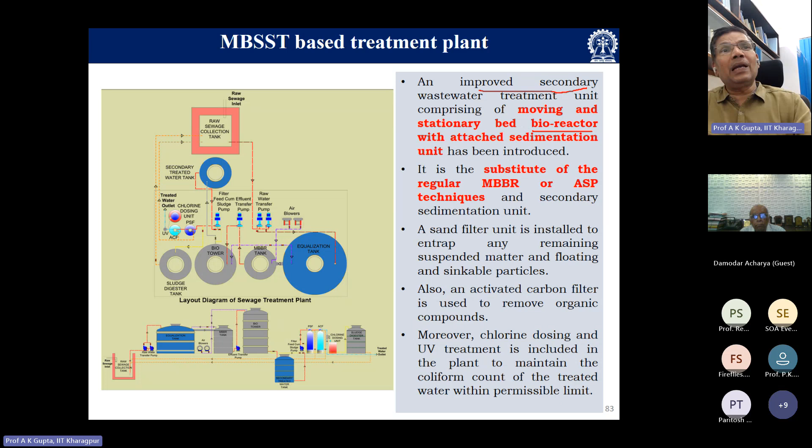I'm sure that in the next 1 or 2 months we can set up another plant where we don't require power from conventional sources - we'll use solar panels to run the plant. That will be demonstrative, set up with hybrid technology, so other emerging contaminants can also be removed.

Now what are the challenges? This overall you must have seen. In the next few minutes we'll talk about the major challenges here. As you know, in the water sector, water security in India faces several issues and challenges that threaten the sustainability and development of the country. So what are the major challenges we are having?

One is over extraction of groundwater, water pollution, inadequate distribution, lack of proper water management, and many things not in our hands, like climate change and conflict over water. India heavily relies on groundwater, which is depleting at an alarming rate due to over extraction for irrigation, industrial and domestic uses. As I've said, 90% of water is used for agriculture purposes, so if we manage water provided to agriculture properly, this exploitation can be avoided.

As you know, groundwater cannot be recharged quickly - it requires several years to recharge the deep aquifer. We have huge rainfall in our country - we are very lucky. We have rainfall from the southwest monsoon, which is the major contributor to rainfall in our country.

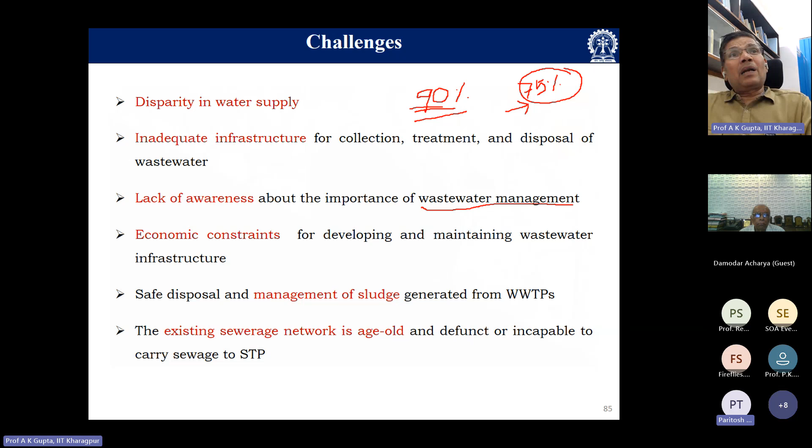Another important point: in our country, maximum 90% is used for agriculture purpose. Only four crops use 75% of the water. Imagine, some crops have huge requirements, particularly rice and some others - those crops consume 75% of the water. Where water is scarce, we have to plan our agriculture activities so that we have minimum exploitation of groundwater.

These are some of the constraints. And another one - we have very old defunct networks. Bangalore also, you must be aware, last year was facing tremendous water scarcity. They even had to close academic institutes for 2 months because there was no water. Imagine, because we have not planned.

With increasing water scarcity, there are growing conflicts between different states, communities, and sectors over the distribution and use of water. So addressing these challenges is crucial for ensuring water security in India and sustainable development of the country. These are some of the challenges we are having, apart from the operational issues.

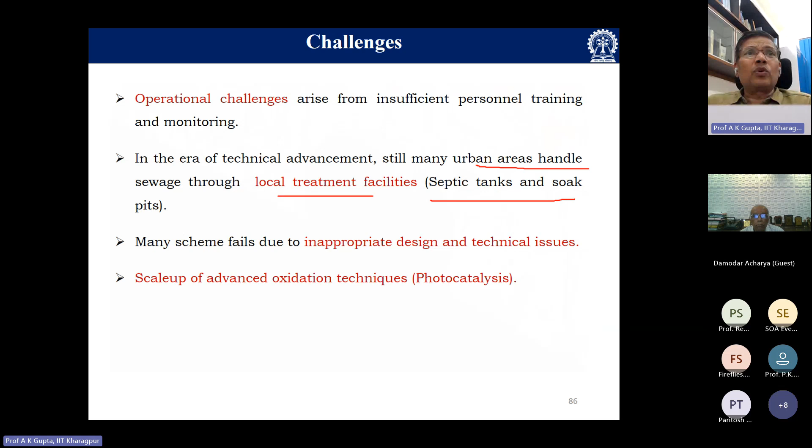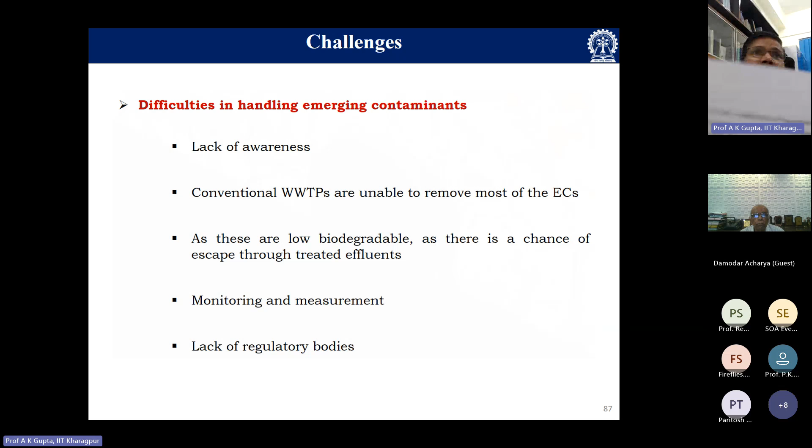In an era of technical advancement, still many urban areas handle sewage through local treatment. This is because in many places we do not have this network, as I said before. So we should use technology for handling these issues. There is difficulty in handling, but there are provisions that we can use technology for and handle these issues.

And now everywhere is coming towards sustainability. So there needs to be a paradigm shift in our mindset. What was thought as waste yesterday can become a valuable resource tomorrow. So today is the perfect time to implement 4R. We have to first reduce the consumption, and even what we are using, we should recycle, we should recover, and again reuse it. So this 4R concept should be implemented and used effectively.

So what is the sustainable solution? Everybody together should come forward. It is not easy, because many times when we are making a water supply scheme, we realize how difficult that is. So for improving India's water security, it will require a combination of policy, technology, and behavior solutions. An essential strategy is to enhance the water governance system with clear policies - particularly we should have laws and institutions to manage and allocate water resources effectively.

Efficient water management practices like rainwater harvesting, conservation, and recharge should be adopted to reduce water wastage and increase availability. The country needs to invest in water infrastructure such as dams, reservoirs, and canals to improve water storage capacity and distribution, and mitigate the impacts of water related disasters. Promoting the adoption of water saving technology like drip irrigation, micro irrigation, and water efficient appliances can significantly reduce water consumption and improve productivity.

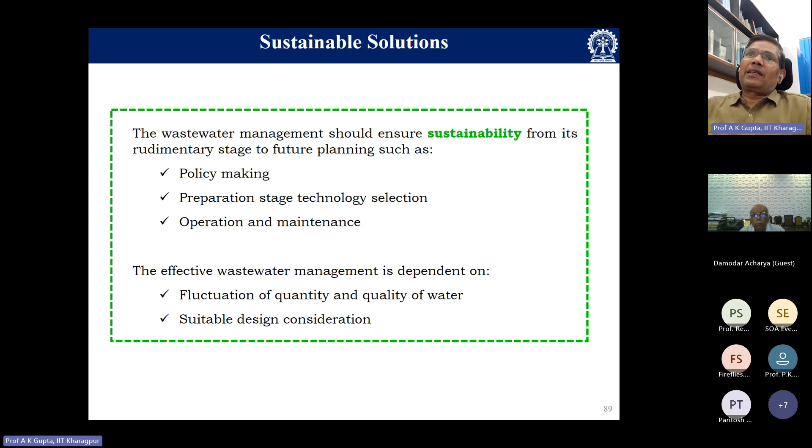So it requires a multiple stakeholder approach with active management from government and other stakeholders. With community and everyone's support, this can be achieved. This is not like we do not have a problem in the water sector - only management is the issue, and how to manage it. So we can solve this problem with everyone's support.

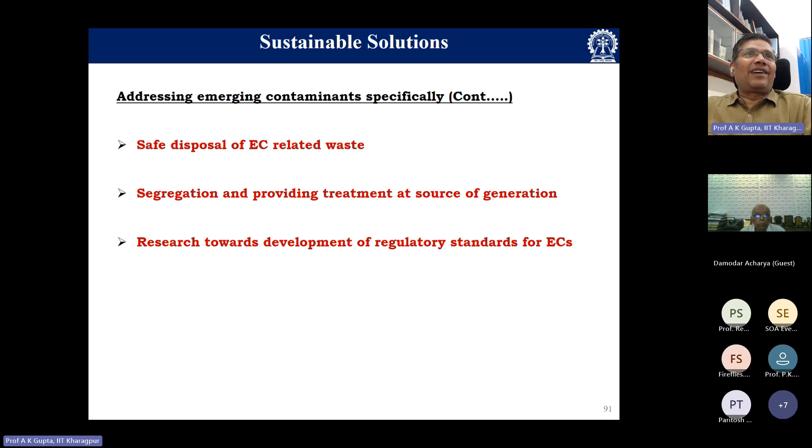So these are some of the sustainable approaches which I have just discussed, and how we sorted out the emerging contaminant issues. I think with this I will stop, and if there will be any question answer session or discussion, I will be happy to answer that.